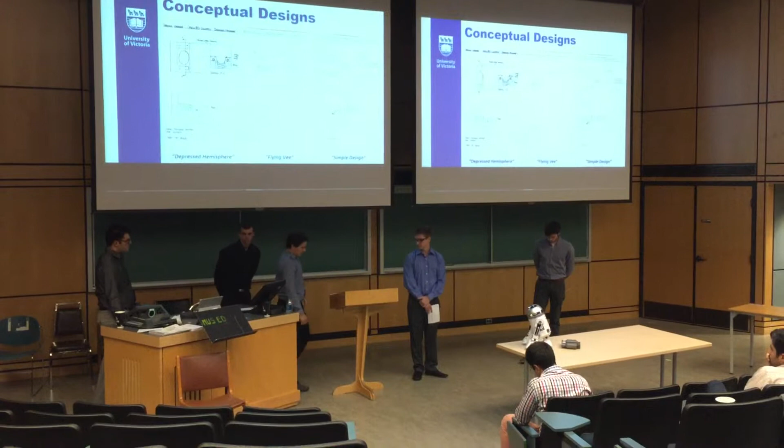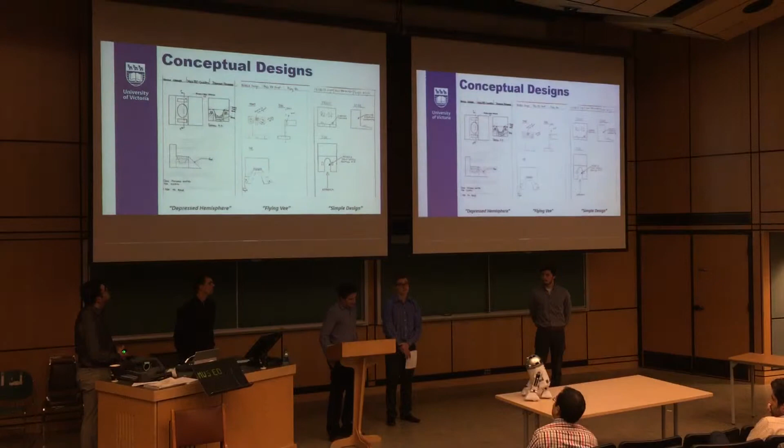So after all our objectives were met, we came up with 3 conceptual designs. The first one on the far left, we called the depressed hemisphere. In this one, the terminals were unexposed, which made it really safe. The robot will drive forward onto the ramp until the ball went into the depressed hemisphere and charge would be initiated. In the middle, the Flying Vee, we called it.

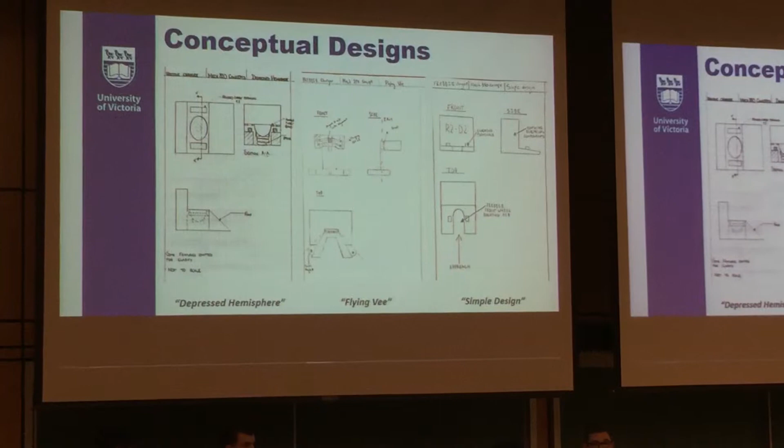It had a V-shaped fork that was located on a swivel to improve the docking accuracy and increase the range of entrance of Freddie. On the far right, our simple design. Freddie will drive straight forward onto the ramp. The terminals are exposed, but they are still safe, and we'll get into that later in the presentation.

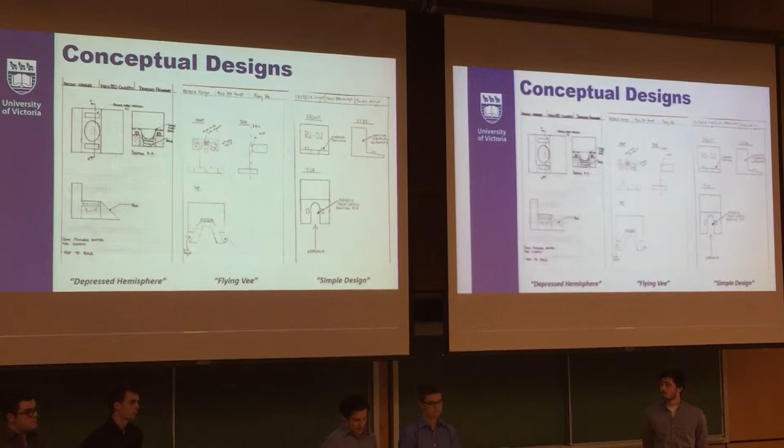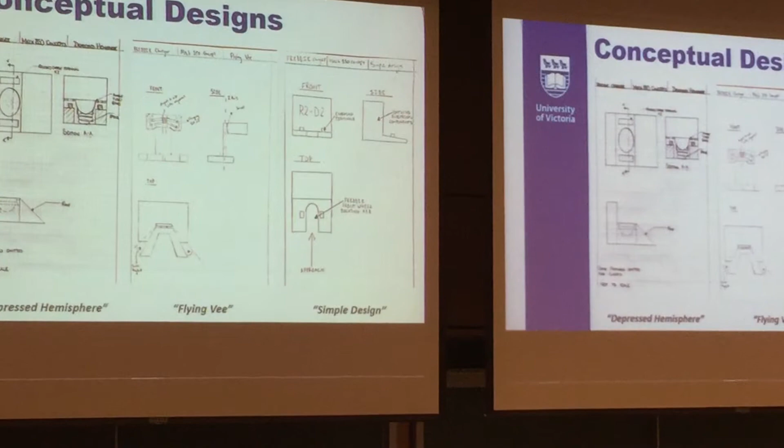There will be terminals on the bottom of Freddie's foot, which will make contact with the spring-loaded terminals on the charger, initiating contact. We chose through criteria-based decision-making tables and weighted values, and our overall group's consensus, we chose the simple design.

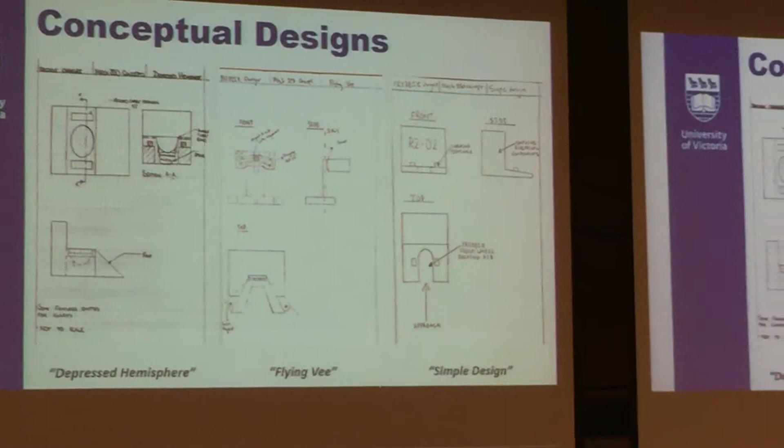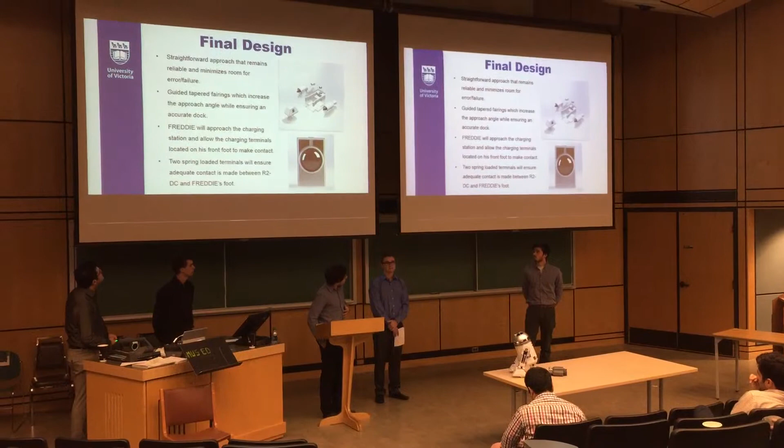Final design. As you can see in the animation on the right-hand side, Freddie's foot will approach straight on. He will enter the ramp with the aid of the tapered fairings that are at 15 degrees. These fairings will aid with the angle of approach.

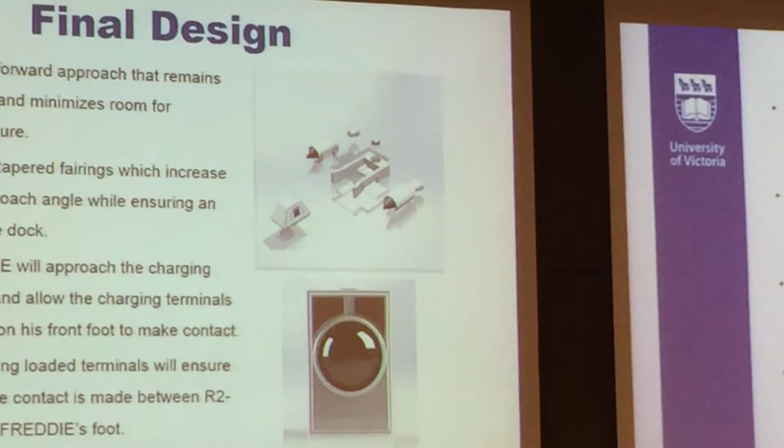The charging terminal is located on the bottom of Freddie's foot, which you can see in the bottom picture. It will make contact with the 2 terminals on the charger, and the charging will commence. The spring-loaded terminals located on the Freddie charger will ensure an adequate connection is made.

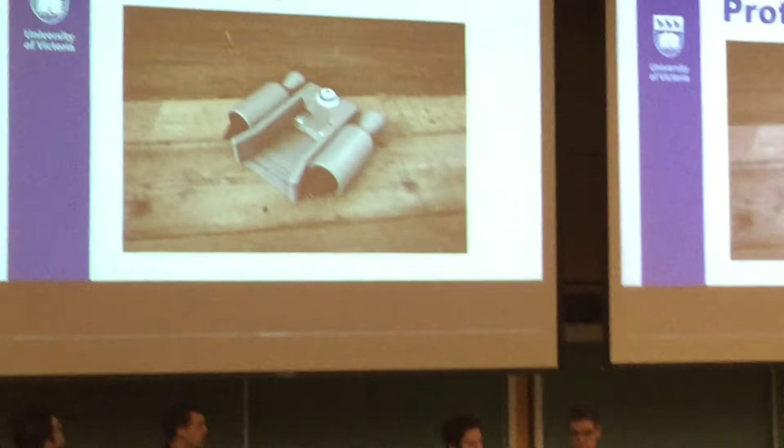This is the picture of our final prototype, which was 3D printed from biodegradable PLA plastic. You can see the flat base, which, although we didn't have a chance to test it on carpet, was designed to maintain a constant height between the floor and the foot of the charging terminals.

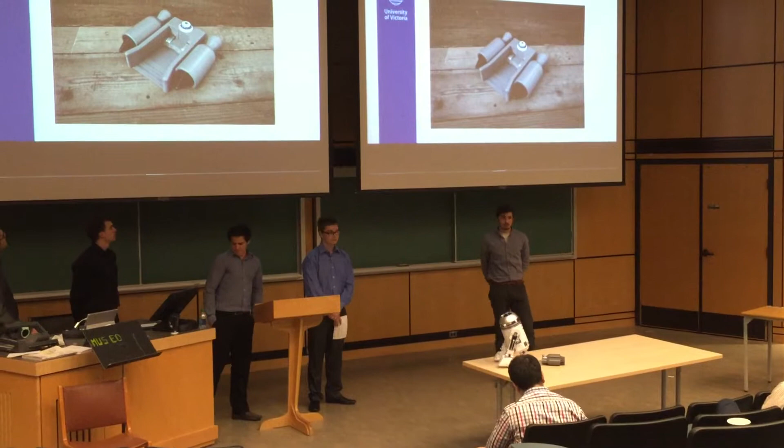It was tested on vinyl floor with a bit of a lip, and Freddie has no problem popping up onto the surface, so that worked out well. There's stainless steel charging terminals, which are spring-loaded to allow for any angle of Freddie's foot or any inconsistencies.

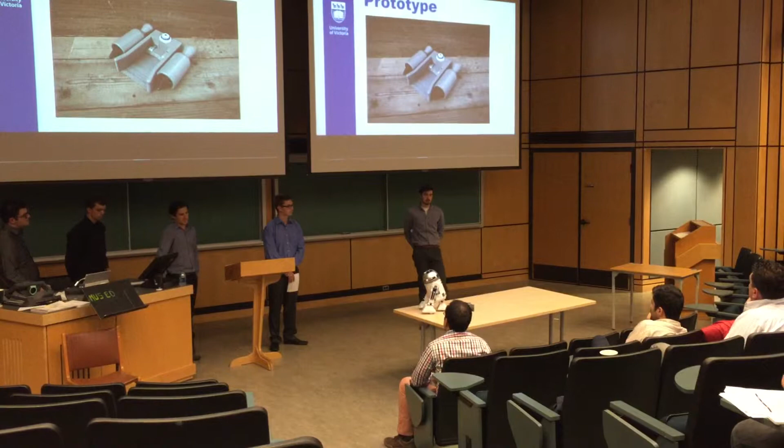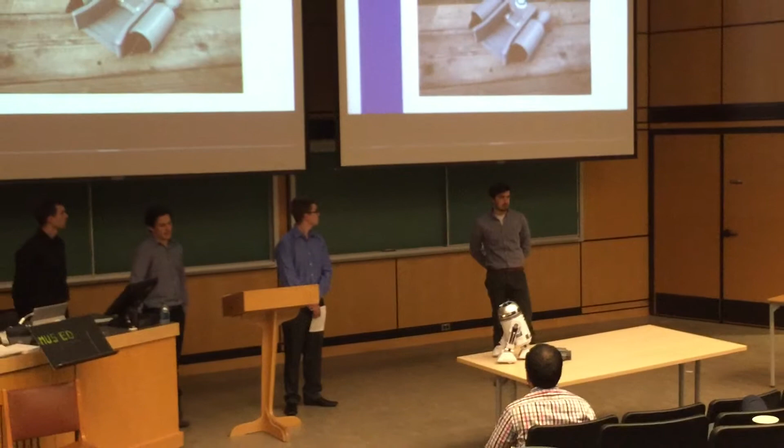We have an LED light hidden inside the Freddie's head-themed dome on the top, and we went with a design that used no moving parts except for the spring action of the terminals to ensure that it was always going to be reliable and the product would never break down. We also tried to choose an aesthetically pleasing design because we figured it was a product for kids, so it would be fun to get a little creative with the shape.

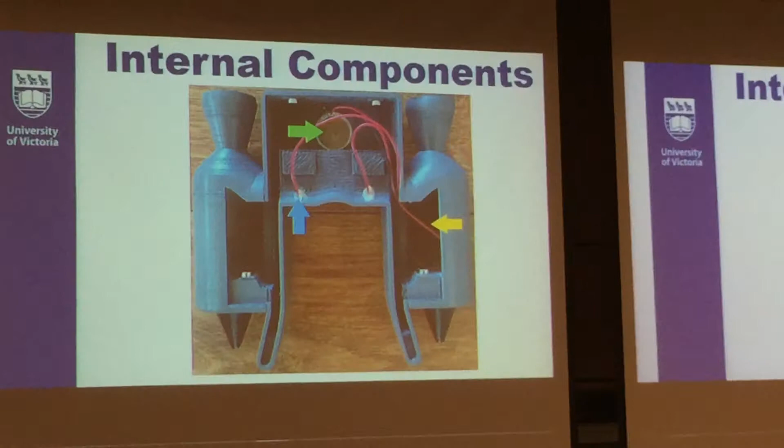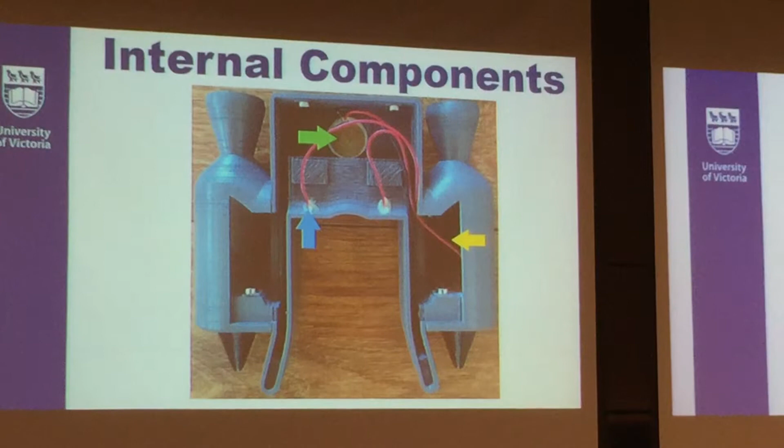This is the inside of our prototype. We weren't positive on what the charging requirements were going to be for the final product, so we just have a simple LED circuit hooked up inside. The green arrow points to our batteries that power the light.

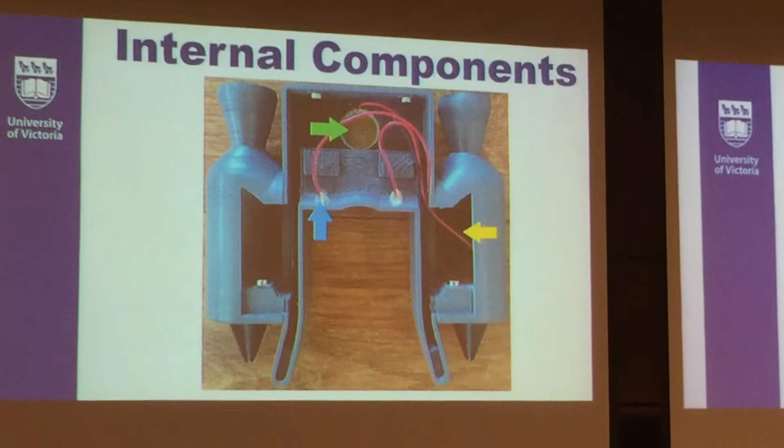The green arrow is the underside of the plate holding the LED in position, and the blue arrow shows the epoxy that holds the wires and terminals in place.

Our prototype's bottom cover is attached with magnets just to ensure that we'd be able to get back inside and make any changes if necessary. However, the final product would have the bottom cover epoxied because there would be no reason for customers to access the electronics inside. The idea was to have the inside hollowed out as well, so that if any electronics needed to be stored in the charger itself, there would be space for that.

And we would, for the final design, propose a laptop-style charger, which has the transformer box included in the charge cable.

After seeing the prototype and the exposed charging terminals, you may think you would get shocked if you touched the two terminals. To ensure this would not be a risk, we looked at the national safety standards currently in practice. Specifically, we looked at the UL Safety Standard 1310, which covers a Class 2 charger for a child's toy. It specifies that the maximum allowable voltage for charging must be less than 42 volts.

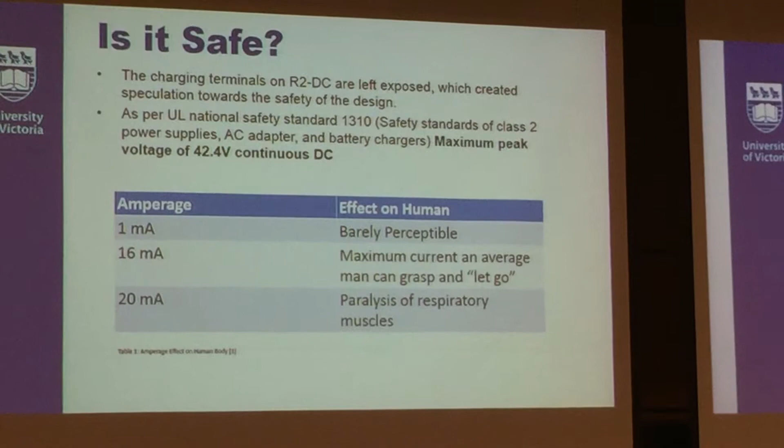To help understand the safety of the charging, let's assume it operates at 12 volts. The resistance of human skin varies from 1,000 to 100,000 ohms, with 1,000 being wet or cut skin. If the average child's skin has a resistance of 20,000 ohms, using Ohm's law we can determine that the current flowing through the child will be less than 1 milliamp.

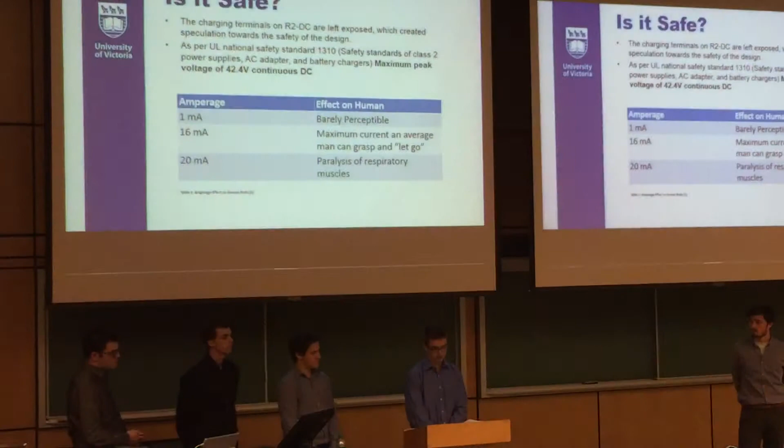Looking at the table, you can see the effects of varying currents flowing through the human body. A current value of 1 milliamp would be a faint tingle, if it is even noticed by the child at all. So this simple calculation demonstrates that the two exposed terminals will be safe for use in the household.

Once we developed our prototype, we proceeded to test it to make sure we met our objectives. For size, as Matt mentioned, we wanted less than 8 cubic feet, and we achieved a total size of 0.032 cubic feet. For weight, we wanted less than 20 pounds; currently our weight sits at roughly 1.1 pounds. Keep in mind this is just the prototype itself with no internal components, so the weight would increase a bit.

Stability: as Freddie would dock, we wanted the charger to maintain stability both horizontally and vertically. It did that, so we gave it a pass. Portability: our charger is portable, so it passed on that as well.

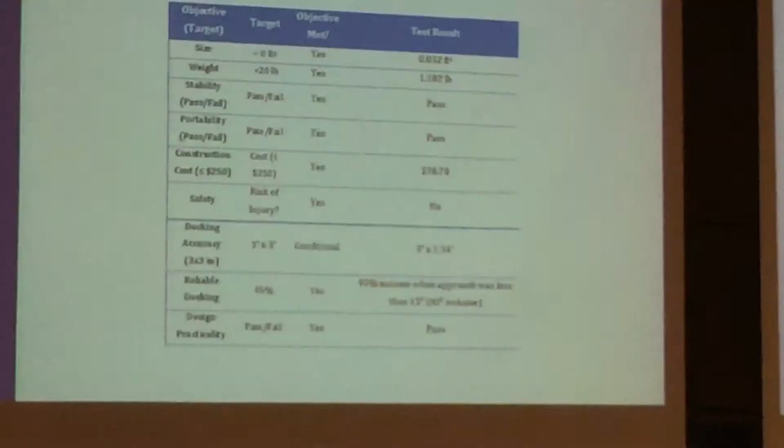Construction cost: we had a target of less than or equal to $250, incorporating material costs, labor costs, and potential electrical components priced out. For 100 units, each unit would cost about $76.79.

For safety, as Dave mentioned, the exposed terminals don't pose a risk. In terms of anything else, we think that overall it would be safe.

Docking accuracy: we have a target of 3 inches by 3 inches. We listed it as conditional because our charger meets the objective of a 3-inch depth, however only supports a width of roughly 1.5 inches, which doesn't meet the 3-inch width objective. So we have some future recommendations, which we'll talk about later, on how to improve that.

At 85% docking accuracy over 20 tests, Freddie was able to successfully dock 90% of the time when the approach angle was less than 15 degrees. For design practicality, we passed that part too. Overall we feel our design is safe and does the job, so we passed on that.

Coming up, we have a video that we put together that takes us through the steps of our design, from 3D rendering on SolidWorks to 3D printing, and some of the tests we put together.

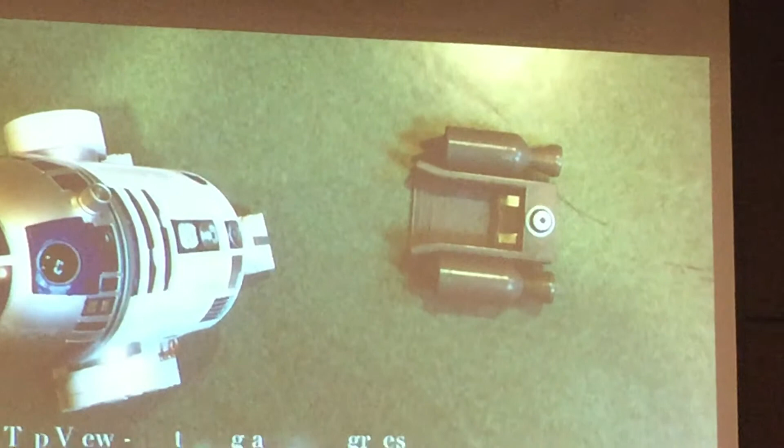For some future recommendations, if we're going to a production phase, we'd like to incorporate infrared guides in the dome. This is just to help Freddie determine where the charger actually is and also help with positioning accuracy.

As the prototype sits, we don't have a current cutout for the AC adapter. We just have batteries in there, as Matt mentioned earlier, just to test the connection between Freddie and the charger itself. So if it were to go to production, we suggest adding a cutout on the back end there.

We'd also like to widen the guide fairings to increase the approach angle. Currently we have a total angle of 30 degrees, so we'd like to increase that angle a bit to also assist Freddie in docking.

We'd also like to increase the angle of the back plate. I don't know if you noticed in the video, but there were times when it was docking and the light would flicker.

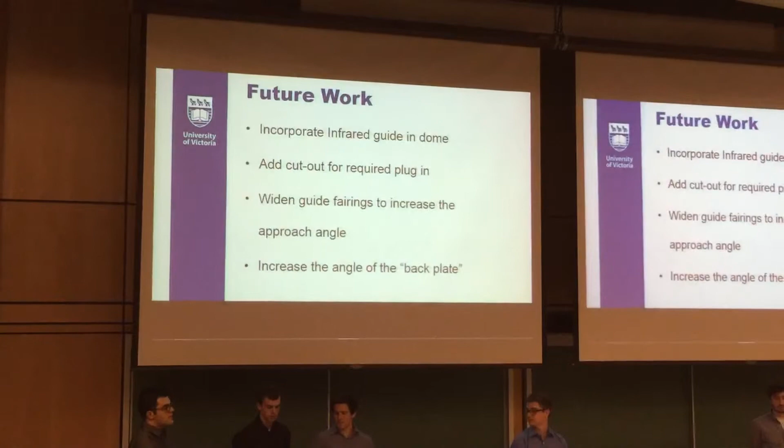This wasn't because there wasn't a secure connection, it was more so if the charging station itself was closer than expected, when Freddie would roll on, his wheels would keep spinning and it would kind of lift up his front wheel. So currently our back plate sits at 90 degrees. We kind of like to taper it out from the bottom up to stop that front wheel from kicking out.

So in conclusion, our goal was to design a safe and reliable charging station that allows Freddie to recharge. From the three conceptual designs that Logan mentioned, the simple design implemented the most practical concept and methods for a charging station. It was proven that leaving the charging terminals exposed poses no threat to anyone using the charger.

And the objectives were met to a satisfactory level, however, there is definitely room for improvement. We'd like to give a special thanks to Dr. Livingston, Dr. Deschef, and our TA Bassam.